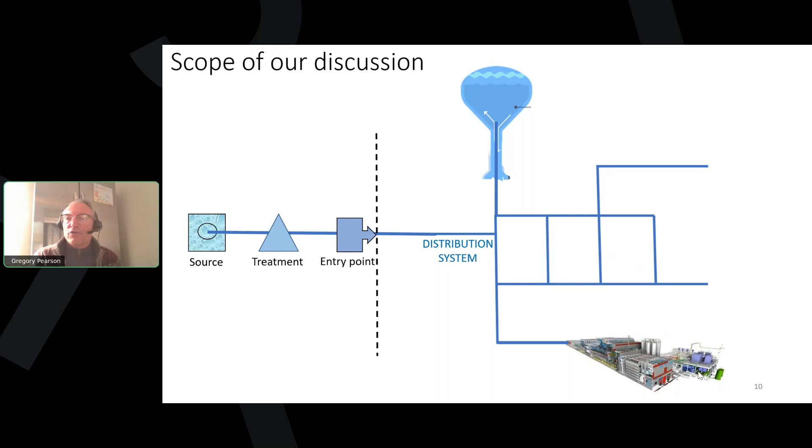If you're in a groundwater system, you might have multiple entry points after each well, just after disinfection. If you have a system with a treatment plant, you'll have treatment and initial primary disinfection. And after the contact time, it is going to enter into the distribution system.

In the distribution system, there are several aspects that we want to pay attention to that are related to quality. For example, in our storage facilities, there are water quality considerations, especially with water age. We could have short circuiting occurring in our storage. Or if we had a storage tank that was designed much larger than we need, we could have excessive water age. Different things can occur in a storage tank, such as nitrification, where nitrifying bacteria consume ammonia in the water and can lead to dangerous levels of nitrate in the water. So those are some of the things that we're going to be discussing.

That's one example. We could also have dead ends in our distribution system, portions of the distribution pipe network that just end and there's not adequate flow. So a variety of things can occur at a dead end. We can lose disinfection residual. We can have high water age. We can have biofilms and bacteria thriving in that dead end if we don't manage it in some way.

And in pipes, the topic of pipes in general, we can have bacterial growth, corrosion, and even problems with materials such as leaching and permeation that can happen in pipes. And also there can be points in the system such as sanitary defects and cross connections where contaminants can enter into the system. So that's kind of an example of the things that we're going to be discussing.

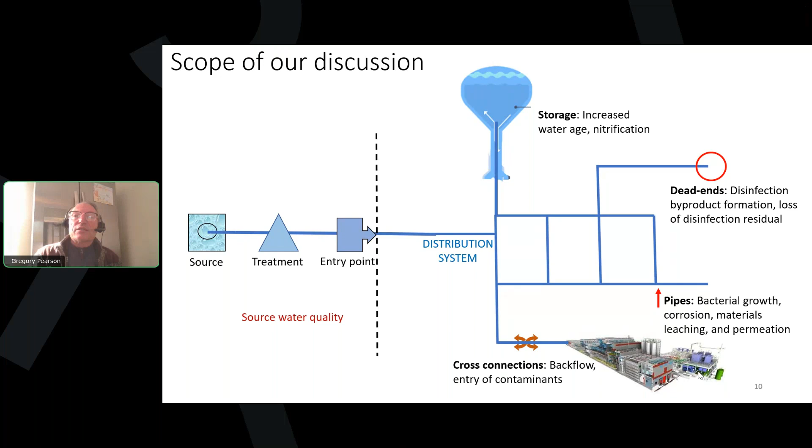Now, even though we're talking about this line between treatment and distribution, the source water quality and what happens at treatment, both of those things can have an impact on the water quality in the distribution system. So as we come across those instances, we'll point that out as we're moving through the training.

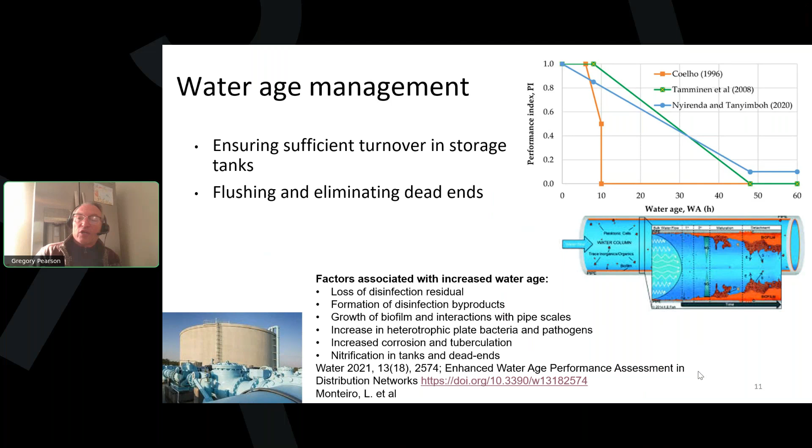And if you wanted to take a look at this study, I've included the link on this slide. It's called Enhanced Water Age Performance Assessment in Distribution Networks. It was done in 2021. It's a pretty recent study, and they were looking at all the factors that can affect water quality. I think that would be an interesting read for you.

We're going to go to our first poll already, poll number 1. And it asks, which of the following is a valid method to manage water age in distribution systems? Is the poll able to launch, Kristen? The poll is launched. And the answer options for this question are: ensure water remains in storage tanks as long as possible, keep at least one hydrant flushing 24 hours a day, periodically flush dead ends, or D, all of the above.

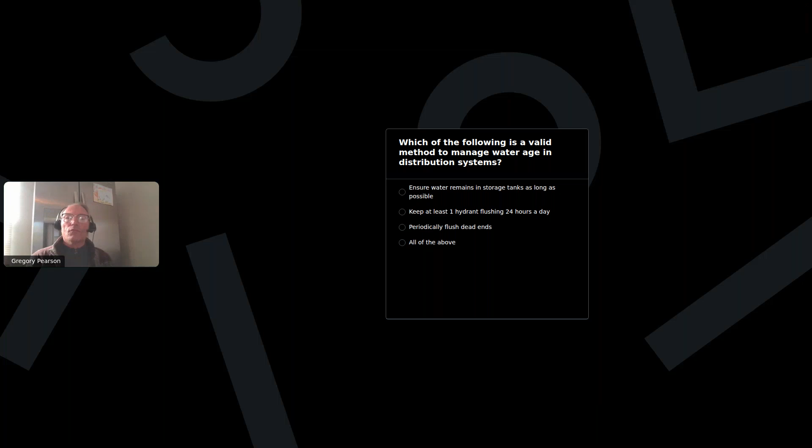All right, Greg, the majority of people, 82%, said C, periodically flush dead ends.

Excellent job. And thank you for managing that, Kristen. I didn't see the poll on my end because I'm on full screen, I guess. No problem. Well, I'll make sure to read through those for each one, okay? Thank you very much.

So periodically flushing dead ends is definitely one of the methods we can use to manage water age. So if we have problems with disinfection byproducts, maybe in the warmer summer months, maybe it's a monthly gentle flushing of those known dead ends that we have. We also want to work on preventing contaminants from entering the system. And we're still in the introduction portion of this training here, but there's two general ways that contaminants can enter.

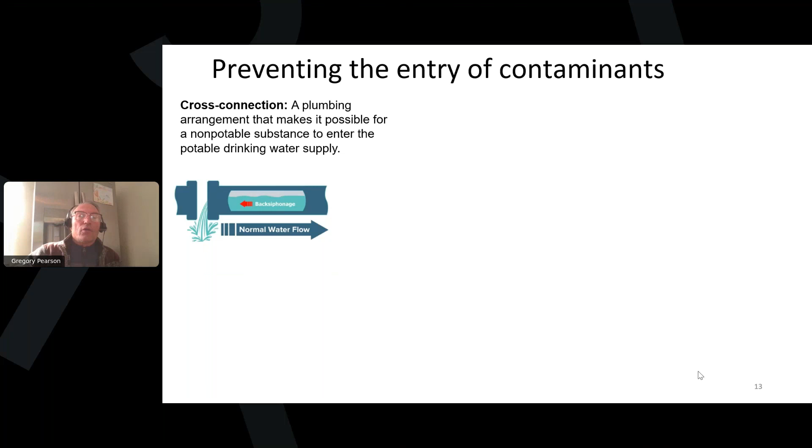One is through cross connections. A cross connection is not the same as backflow. A cross connection is a plumbing arrangement that could allow backflow to occur if there was some kind of reversal of flow. So the two types of backflow that could occur through a cross connection: back siphonage is one type, where the pressure in our distribution system is lost or reduced. And that could occur because there's a main break or there's excessive fire flow or some kind of outage that reduces the pressure in the distribution system.

The other type of backflow is due to back pressure, where we are supplying water to a customer that has some kind of pressure being applied to the water that exceeds the distribution system pressure. It could be anything ranging from a private well to some kind of boiler or possibly a chemical process that has a high pressure pump. It could even occur at a car wash, for example. And we try to protect this from occurring by, of course, first eliminating any unnecessary cross connections, but also protecting the water system with backflow devices. And we'll talk about that in a moment.

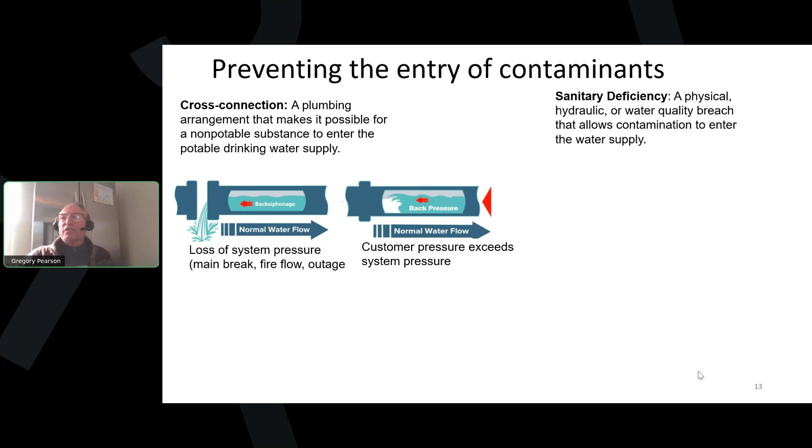The other general way that contaminants can enter the distribution system is through some kind of sanitary deficiency. It's usually some kind of physical breach in the distribution system that could allow contaminants to enter into the drinking water. An example could be an unscreened vent in the storage tank where birds or dust or debris could get into the storage tank. And I've seen more than one storage tank that had a bird at the bottom of the tank, and it was sitting in the tank deteriorating and could potentially make people sick. And there's a variety of sanitary deficiencies that could occur.

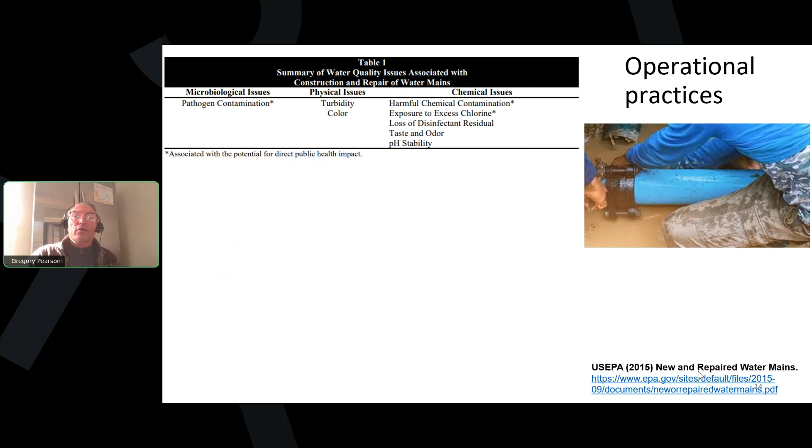And on the chemical issues as well, you could have potential chemical contamination associated with repair of water mains. If there was any kind of chemical or a nearby sewer main or something like that, you can imagine all of the things that could occur in runoff that have gotten into this trench that could be potential hazards if they entered the drinking water supply.

This actually manifested in a serious case in Missouri in 1990. That's not that long ago, but there were 240 documented cases of people getting sick. With these kinds of studies, there might always be more people that got sick but didn't go to the hospital. But at least 240 cases of illness, and 4 people died because of an E. coli outbreak, and it was traced back to 2 water main breaks.

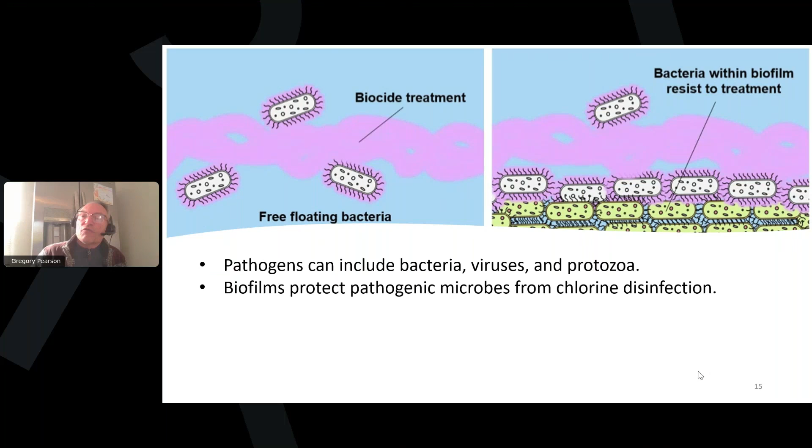It's hard to know. So you want to maintain your disinfection levels and do things such as system flushing, which can reduce these biofilms and help to keep the system clean, so the conditions are not present for bacterial growth to occur, and you're bringing fresh disinfection residual. So we're going to talk about system flushing for a few moments here.

And as you probably already know, I know we're preaching to the choir, because a lot of you are experienced operators, but there's several benefits of system flushing. And the top one, it reduces water age, but we mostly do it to remove the portion of the biofilms and scales that are in pipelines and to remove sediments. Flushing can also reduce the formation of disinfection byproducts, and if you flush dead ends, it brings in a new fresh chlorine residual.

And another good thing about a flushing program, it gives operators a chance to get around and operate the valves and the hydrants to make sure these are working. Having an operating valve that you can get to is important, and I've experienced this myself where you need a valve that has been paved over, for example, and you don't have access to the valve. And I've also been involved in projects to go and find all those valves and bring them up to grade.

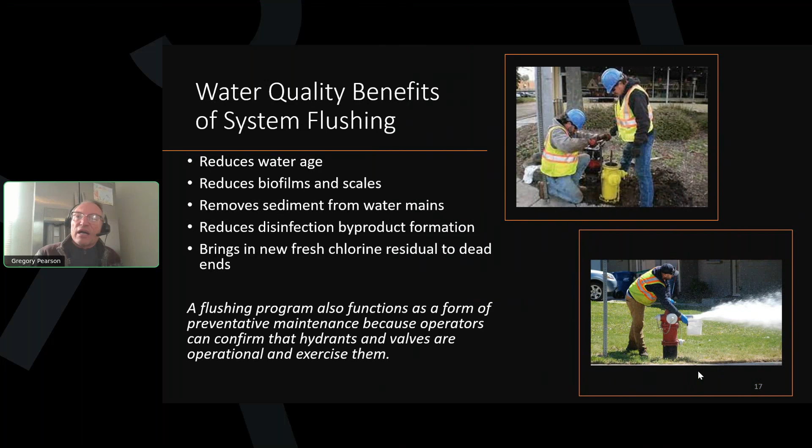And biofilm is really thin. When we talk about it and show it on diagrams, it seems like it's this real thick layer with all these different types of bacteria and microbial organisms. Well, it does include all that variety of microbial life, but it's actually very thin, as thin as a piece of Scotch tape.

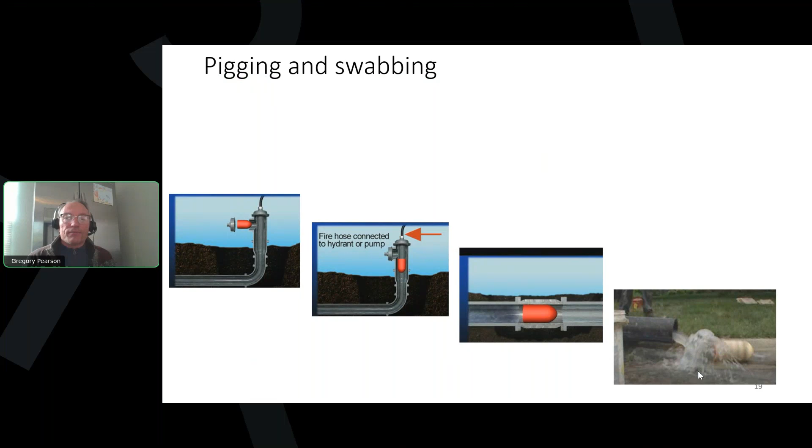Here's an example of flushing using pigs and swabs, and these images here are snippets from an AWWA video, which I'll share the link with you. But a swab is basically like a Nerf ball, you could think of, but it's shaped and sized so it fits right into the pipe that you're trying to flush. So a swab is just a big foam projectile, you might say, and a pig is often the same, but it's a little stiffer and has some kind of abrasive quality on the outside normally.

But you see on the left-hand side, they're inserting a swab at a hydrant, and then they apply a water pressure source, flow source to push it through the main, and it goes through. It's kind of removing, scouring the slimes and the sediments, and it's pushing it out, and then it comes out at a downstream hydrant or pipe, and it's very effective at removing sediments.

You can also have things that are called pigs that are actually data collection devices. For example, ultrasonic pigs, they could measure the thickness of a water main as it passes through very slowly. Those types of pigs, you'd probably run them through just very slowly, but these types of pigs, you're running them through at a pretty good clip because you're trying to remove sediments.

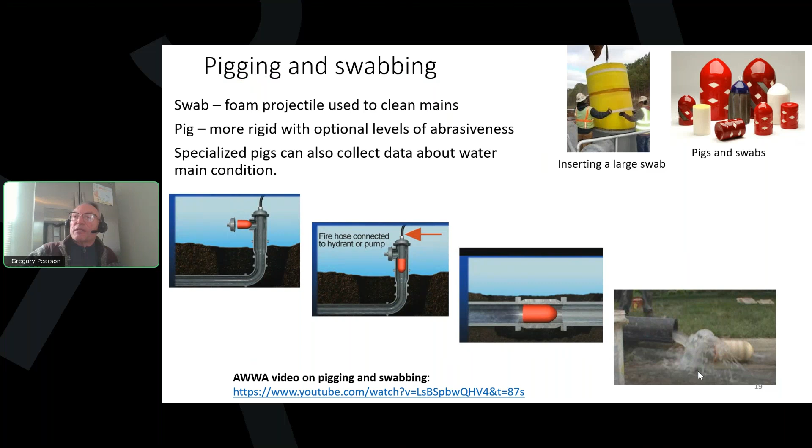And that video is on your slide at the bottom of that slide there, an AWWA video, which actually animates this process. And here's an image of a couple operators inserting a much larger swab. It looks like it's at least a 24-inch to me. I'm not sure of the exact dimensions, but they're inserting that in, and they're going to run it through a section of main. And you can see a selection here on the far right of your screen of different types of pigs and swabs. The red ones and that middle blue one, you can see there's definitely some abrasive material on the outside that will help to remove some of those slimes.

There's also the concept of ice pigging. And ice pigging is very effective at removing sediments and scales and biofilm. It's often used to remove biofilm. And so ice pigging uses kind of a semi-solid ice solution. They bring it down to 24 degrees, and it's water and brine, it's not just pure water, because they don't want it to freeze. The brine acts kind of like an antifreeze.

It's more kind of like a snow cone. So it has all the abrasiveness of the ice, but it can flow around corners and so forth. You couldn't do that with a solid piece of ice, obviously. Very effective at removing biofilm and sediments. And also you prevent the danger of it getting stuck, because if it somehow were to get stuck, it would just melt. So that's another benefit.

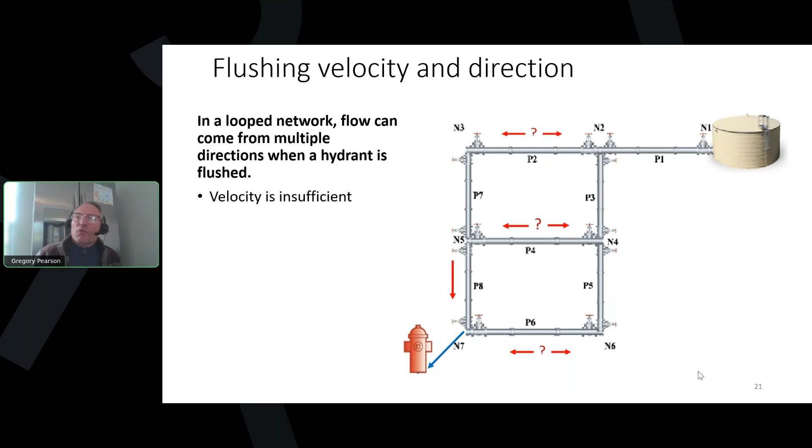Remember, we want between 2.5 and 5 feet per second, but if the water is going different directions, we can't attain velocity, and we can't really efficiently move the sediments from point A to point B. We might just be moving the sediments around, but not actually removing them. Instead, what we do is unidirectional flushing, and we close certain valves. Let's say, for example, we want to go down the top pipe and then down the left pipe.

We would close particular valves here so that we force the water to go in just one unidirectional path. And then we can be assured that we can attain the velocity we need. And it also helps us to make sure we're thoroughly cleaning each pipe.

And we'd go back, and you see there's a middle pipe called P4 and a bottom horizontal pipe called P6 and P3 and P5. We could close different valves to clean each one of those individually. So we can systematically move the sediments by flushing the water from the source of the pressure throughout the distribution system one at a time. So we're making sure we're getting all the sediments out.

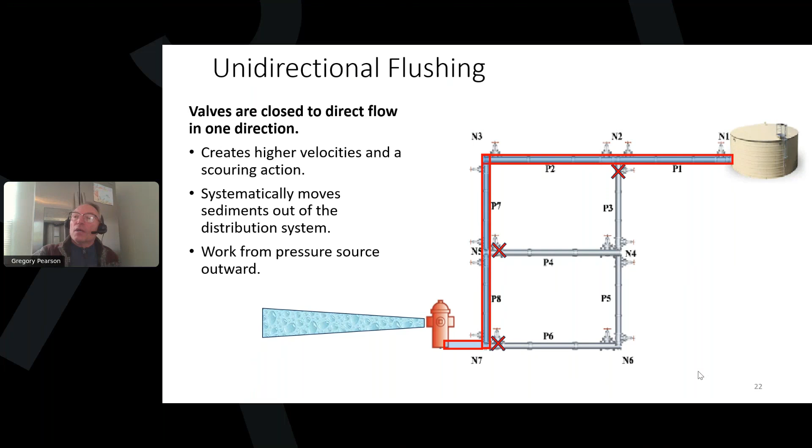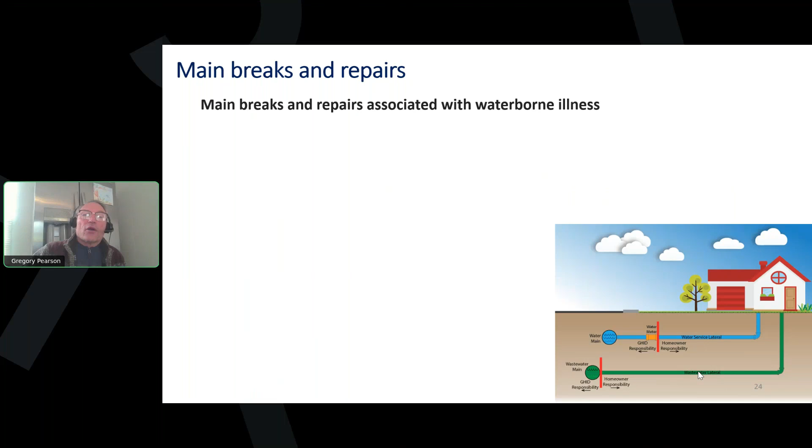If we shift our discussion here to looking at the waterborne disease that's associated with main breaks and repairs, we can see some fairly recent studies. So one was done in 2007 in Norway. They found that households that were downstream of a main break or repair, that's shocking to me. I can see a main break, but a planned repair is surprising. So anything downstream of a main break or repair, there was a greater incidence of gastrointestinal illness.

Same thing in Sweden in 2017, a more recent study. Households were 1.9 times more likely to report an acute gastrointestinal illness after a pipe break or repair in the distribution system. So these are critical tasks that we as operators need to do. We're the ones that have to go out and respond to main breaks and make these repairs. But even planned repairs can result and do result in increased illness. So that's why we have to really be careful.

There are some factors that we discussed a little bit already, but if you have a wastewater system that's relatively at the same level as the water pipelines, and that wastewater main has some small leaks, we could end up having sewer water in our trench and just contaminated groundwater in the trench from the surrounding soil, like we saw in the chart earlier. And of course, cross connections. If you have a main break, it can pull in contaminants through cross connections. So you see how all these things are related here.

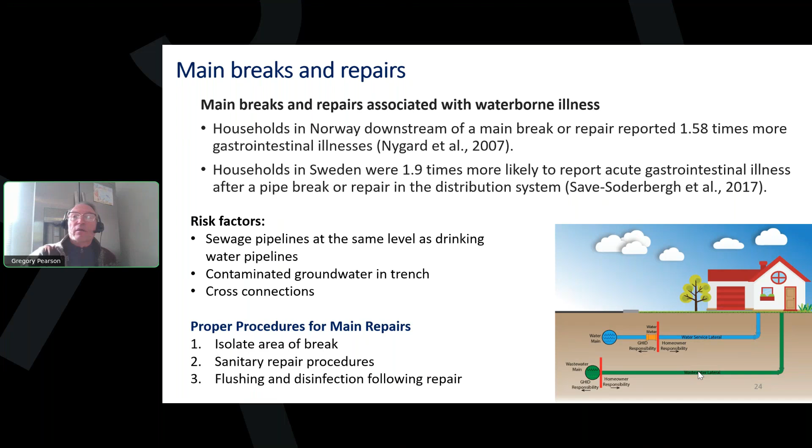Depending on the state that you look at, people say this different ways, but if you lose system pressure and the system is compromised, it's a good idea to issue a boil water notice. That means if the pressure drops even below 20 psi and the system is compromised, you might want to issue a precautionary boil water notice. But for sure, any time that you know that contamination probably has entered. And a boil water notice is just letting people know, boil your water before you use it.

There's a couple of AWWA standards you might want to have in your library. The first is the C651, which is about disinfecting water mains, and they talk in that standard about disinfecting water mains after repairs and breaks. And also there's a water main breaks field guide that AWWA offers. But I did put several resource links into the references sheet about managing water breaks and disinfecting water mains.

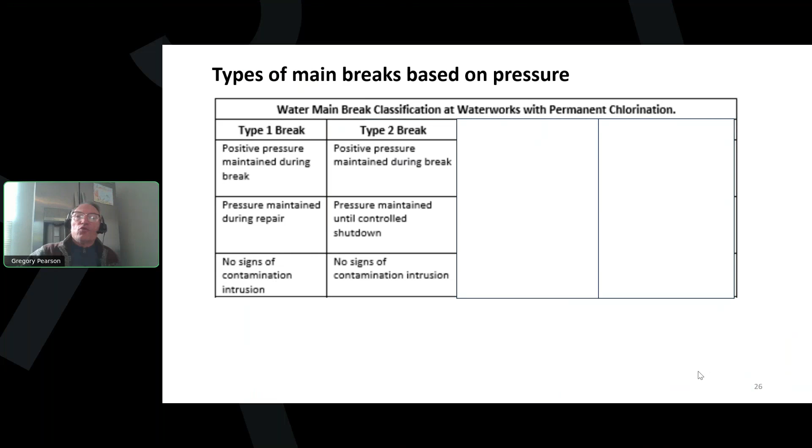Similar is one where you can maintain pressure, but you do a controlled shutdown, so you're not having contamination. So basically, if you don't lose pressure, you may be able to make the repair without a specific disinfection process. But anytime you lose pressure, or if the pressure even drops below 20, you are looking at some additional steps, wanting to isolate that possibly, flush and disinfect, and then disinfect the pipe and all the tools, always with at least a 1% bleach solution.

So the type 3 and the type 4 breaks are different situations where you lose pressure. And the type 4 results in a widespread depressurization of a large portion of the distribution system. So you might be disinfecting and flushing a lot larger portion of the system than with a type 3 break, where you just flush and disinfect the portion that you repaired. But in both cases, you've lost pressure.

We're going to go to poll 2 now. All right, that second poll is now launched. How can operators protect water quality when repairing main breaks? A, isolate the repair site using valves. B, flush the line after repair. C, disinfect the main. Or D, all of the above.

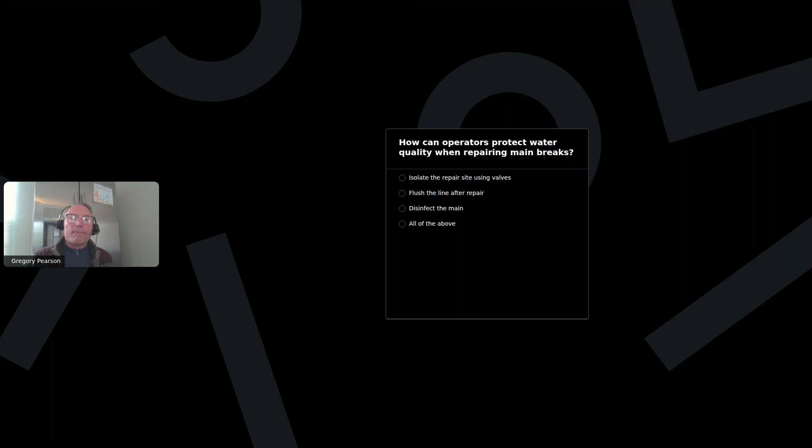Go ahead and get your answers in if you haven't already. I'll give everyone just a few more seconds. All right, and I am ending the poll now. Okay, Greg, 100% of people said D, all of the above. Excellent. You guys are great students.

So not only do you have corrosion occurring with the iron being ripped out of the molecular structure, but having it redeposited. And this is a big problem. As you can probably see here, you would have a lot of friction in that pipe. So you're going to have higher energy to force water through those pipes. You're going to have reduced capacity, and you're going to have areas in that pipe that's going to harbor bacterial growth. And of course, eventually the pipe is going to become weaker and weaker and be more likely to break.

Also, corrosion is associated with the release of lead and copper. Daryl's going to talk about the lead and copper rule a little more tomorrow, but corrosion is responsible for that, the release of lead and copper. Also, eventually these pipes will leak and you'll have water loss and microbiological problems.

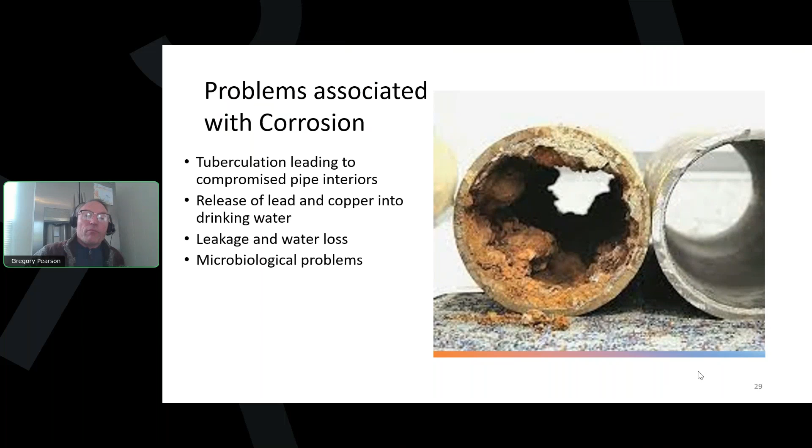So if we give an example here, if we have an aluminum fitting attached to a copper pipe, here we have the aluminum attached to a copper, aluminum is going to be the anode. Electrons are going to be ripped out of that aluminum. Or you can see just above that, the cast iron would also lose electrons to the copper.

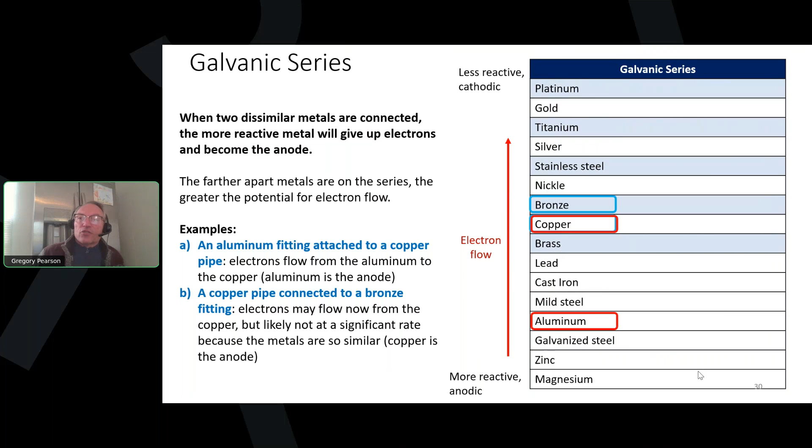On the other hand, if we had copper attached to bronze, that would make the copper the anode and the bronze would be the cathode. So technically, that would be the relationship. However, these two metals are so close to each other, it's unlikely you would have a corrosion problem between these two types of metals because they're so close to each other on the galvanic series.

Now, I say it was destroyed. Now, cast iron, that might have been a 70-year-old pipe or something like that. So, cast iron, it's not our preferred pipe. We don't really install that anymore in water systems. However, a lot of cast iron pipe is still in service, but just know that it is more susceptible to corrosion than something like ductile iron. There was a reason why they made ductile iron and especially cement coated ductile iron, because they're trying to develop materials that are corrosion resistant.

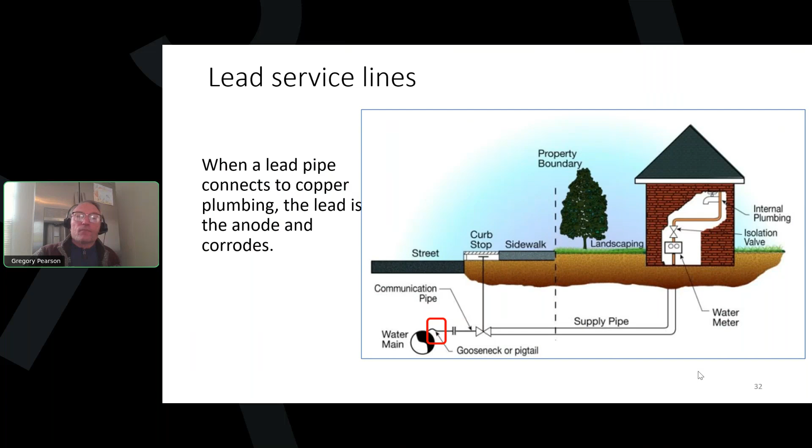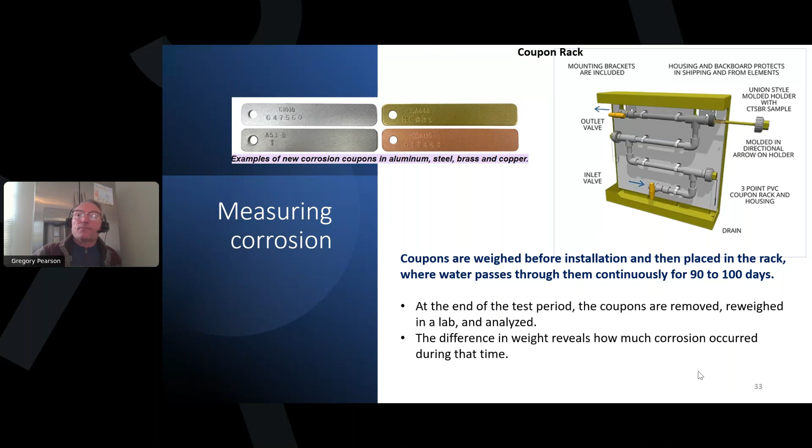And then finally, cathodic protection, which uses a DC current. If electrons are trying to flow from the pipe or the tank, the DC current goes in the opposite direction to disrupt that flow, and has sacrificial anodes that will give up electrons instead of the material you're trying to protect. I'll show you an example of that here.

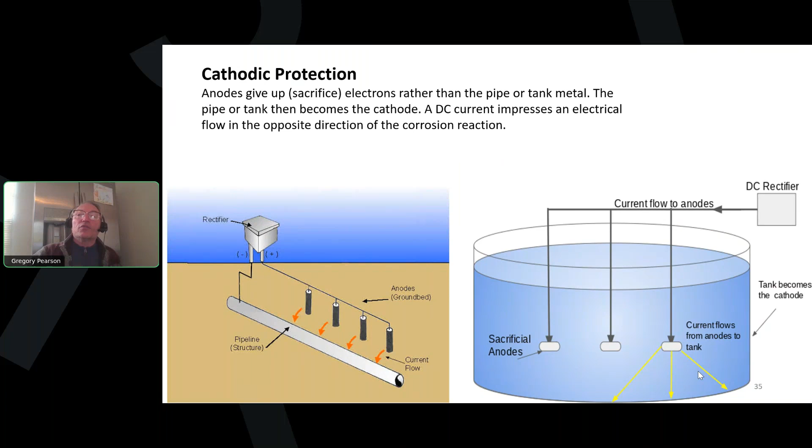So that's cathodic protection. A way to predict when corrosion is going to occur involves using the chloride to sulfate mass ratio. They call this the CSMR. This was something that is associated with what happened in Flint, Michigan, and I'll show you that in a moment.

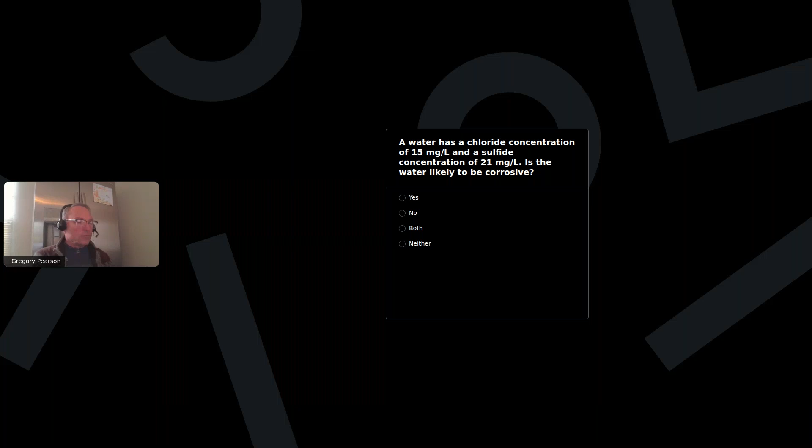All right, the majority of people have put in their polling votes, but I'll give everyone just a couple more seconds and then I'll close the poll. All right, closing the poll now.

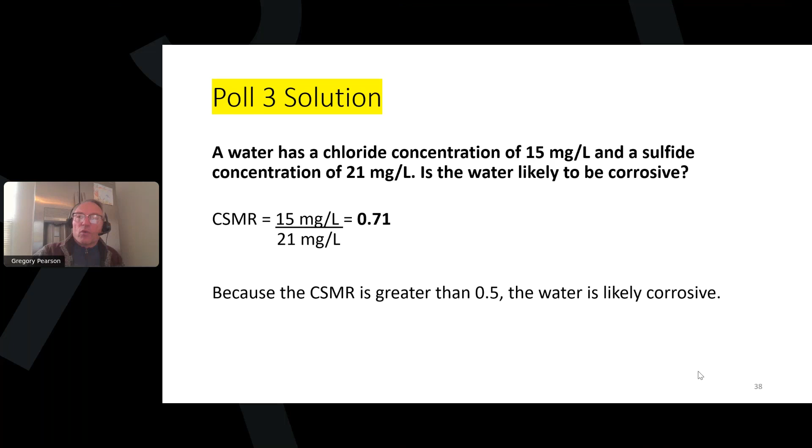All right, Greg, so 79%, the majority of people said yes, that the water is likely to be corrosive. Excellent job, everyone. Let's look at the solution here. It's chloride to sulfate, so we take the chloride of 15 milligrams per liter divided by the 21 milligrams per liter of sulfate, and we get 0.71. And because that's greater than 0.5, it indicates that the water is likely corrosive, or potentially corrosive, you might say. There's other factors, such as the Langelier index.

If there's a lower pH than the saturation pH, it means that the water is likely to be corrosive. The saturation index or the saturation level means you have a level of alkalinity that is just saturated. In other words, it's not going to be scale forming and it's not going to be corrosive. And so we look at the difference between the actual pH and that saturation level.

And this somewhat depends on the temperature of the water. It's pH dependent. If this is negative, the actual minus the saturation negative, it indicates that water could be corrosive. If it's positive, it means it can be scale forming. If it's 0, it's not going to be scale forming or corrosive. And of course, there's a range.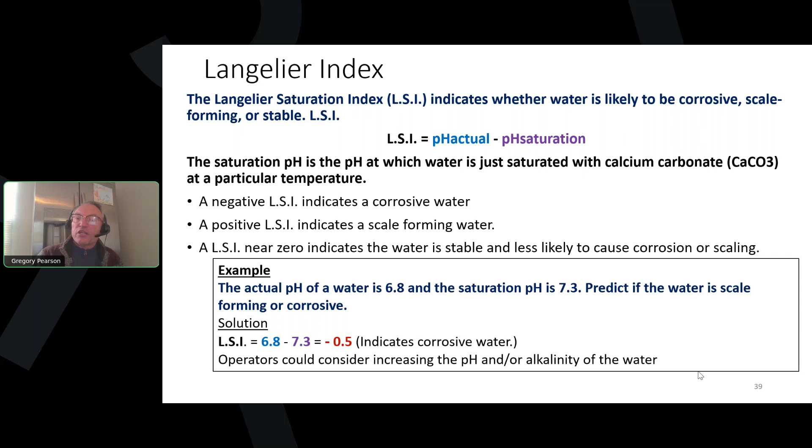So using the Langelier index along with that chloride to sulfate mass ratio, and then of course also looking at the pH and alkalinity and overall water quality, those would be good things to look at. And the first step if you did have a corrosive water would be to possibly consider adjusting the pH or alkalinity. Alkalinity below 30 is indicative of likelihood to be corrosive.

And if you get up higher, even as high as 200 milligrams per liter, it actually is good to prevent corrosion. Of course, the higher you go could also be a problem with scale formation if your pH was higher than the saturation pH. If you needed to adjust alkalinity, you could add something like lime or soda ash. If you needed to adjust only the pH, you could use something like sodium hydroxide.

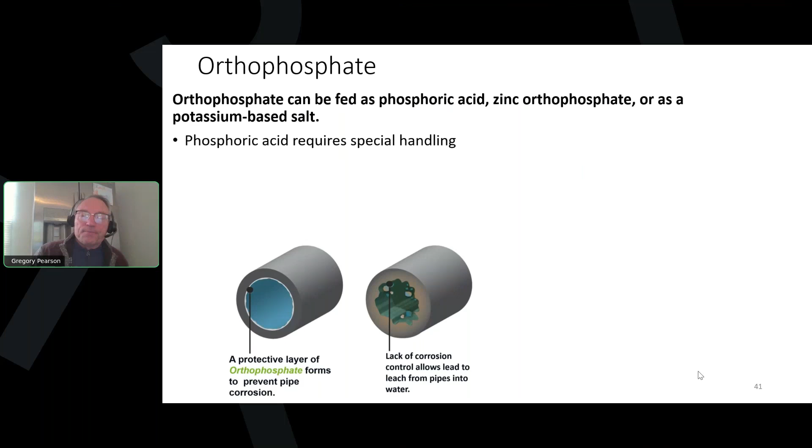If those don't work and we need to feed a corrosion inhibitor, we can feed something that results in orthophosphate. And there's several things that we can use: phosphoric acid, zinc orthophosphate, or some kind of potassium-based salt. And if you use phosphoric acid, that's a very dangerous chemical. It can cause severe burns, and so it's not often used. And ultimately, the dosage is pretty low, between 0.5 and 1.5. You don't want it to be too high. You don't want excessive scale to build up.

And this orthophosphate can even help prevent problems when you transition from one type of disinfectant chemical to another, such as from chlorine to chloramine. In looking at the different options, no matter what type of chemical you use, it's orthophosphate which is the end result, the PO4, basically a phosphate oxide. So you're trying to create that. So you can use phosphoric acid once again, but more likely you're going to want to use zinc orthophosphate or some kind of potassium-based salt.

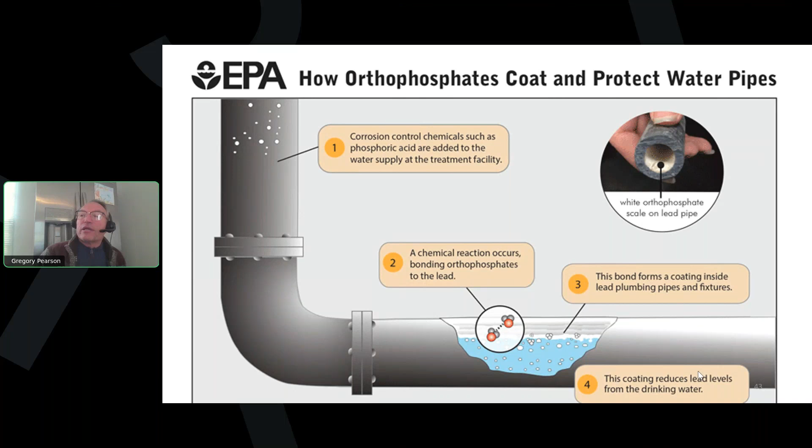There's a lot of factors that are involved with causing tuberculation. Probably the first one would be just having cast iron pipes, but also you have water, say for example, with a low pH and alkalinity, a higher temperature, and higher water age, and the conditions are right for biofilm growth.

Maybe there's a little bit of organics in the water, and then you've got a recipe for tuberculation to happen. And if it does occur, it reduces your capacity, increases the friction, and causes a lot of problems with water quality and main breaks.

And scales and biofilms can actually interact in other ways as well, not just in tuberculation. When scales interact with biofilms, it can result in the release of toxic heavy metals from scales, and the biofilm can take it up, and then as the biofilm detaches and reattaches, it can release some of those. And of course, biofilm can also release pathogens at any time, and it can also enhance corrosion processes because it's occurring near the pipe surface between the biofilm and scale. It's happening at a micro level, and it can enhance corrosion.

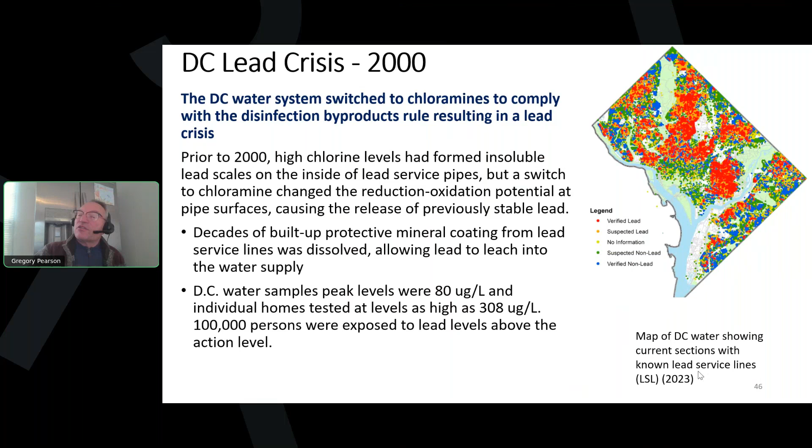And it actually was worse as far as the official measured levels than Flint. In DC, they measured levels as high as 80 micrograms per liter. And there was some testing at individual homes that were as high as 308 micrograms per liter, and 100,000 people were exposed. You see the map of DC Water. This is a current map showing areas that still have lead service lines. So they're still dealing with this.

They switched to feeding orthophosphate in 2004 as a solution, but this is not a problem that they were able to just solve in a couple months. It's an ongoing process that they're still working on. They're in compliance now, but they still have to work on removing the lead service lines.

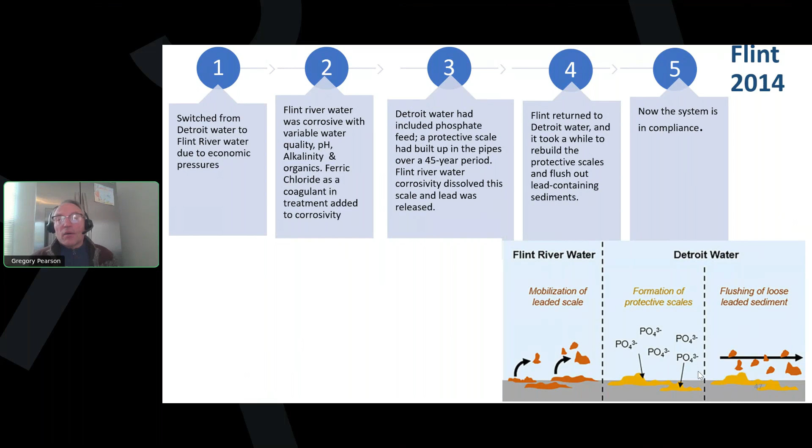In Flint, they switched water source: they were taking water from Detroit, and they switched to the Flint River, and it had variable water quality characteristics, and there was a high chloride to sulfate mass ratio. They also were using ferric chloride as a coagulant in the treatment process, which, except for the problems that occurred, was actually a great choice. It was inexpensive, and it works well in cold weather, and Michigan is a cold place. However, adding ferric chloride to water that already had a chloride to sulfate mass ratio problem increased the corrosivity quite a bit.

And they had been using Detroit water for 45 years, and Detroit water had been feeding orthophosphate. So they had this scale in the service line pipes, and this scale was dissolved. Kind of the same story, but a different route, and it began to release lead and copper. And it was also very corrosive. And so the existing copper and lead service lines were being corroded, and lead and copper, mostly lead was the problem here, was being released into the water.

It also resulted in the iron pipes being corroded, which took away the chlorine residuals. So there were actually some serious problems. Some people died. It wasn't because of lead necessarily. It was because of a loss of chlorine residual, and I think it was 12 people that were affected by a waterborne disease. They're now in compliance, but there are a lot of lessons that we learned here. First of all, that chloride to sulfate mass ratio was 2.04, very high. The corrosivity not only caused problems with lead, but it also consumed chlorine, which reduced the microbial protection.

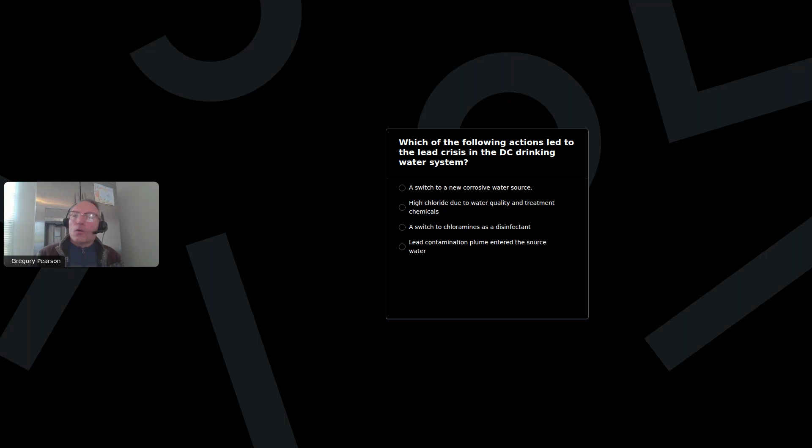All right, we got kind of a mixed bag here, but the majority of people said C, a switch to chloramines as a disinfectant. That's 62% of people said that.

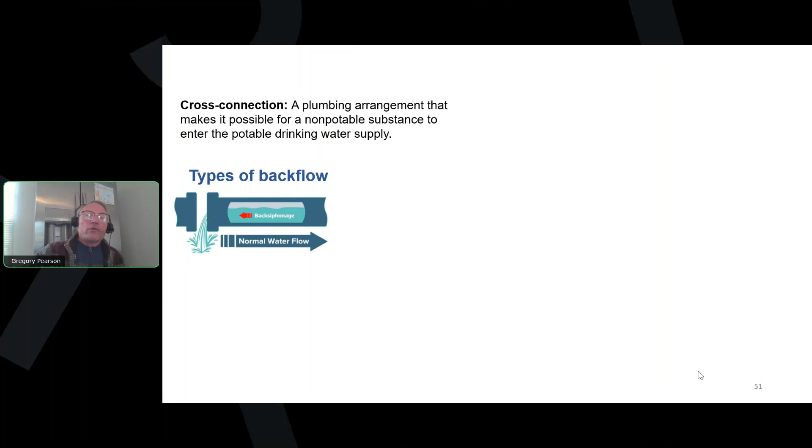Now, we talked about this a little bit already, but cross connections are just simply a plumbing arrangement. And there's 2 types of backflows: back siphonage and back pressure. And a backflow event requires both of these things to be present: the existence of a cross connection and some kind of pressure differential that causes a reversal of flow. There's some different ways to protect against this. And basically, when you put in a backflow protection device, you're removing that cross connection, because the cross connection is a pathway that water can flow through, where if you put a protection device there, water can no longer move in a reverse direction through that same pathway.

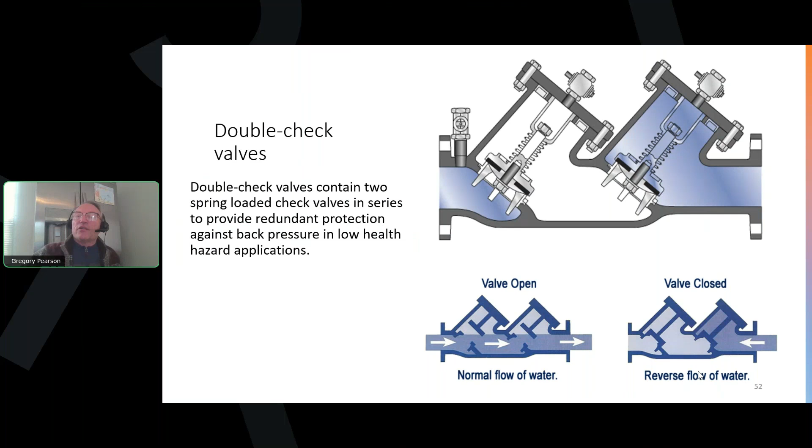A double check valve is an example of a backflow protection device, and it basically is just 2 check valves in series. When the water is moving in the way I have the picture here, if it's moving from left to right, the water pushes those check valves open. It can pass through. If it tries to go from right to left, in other words, a reversal of flow, it forces those check valves closed. And by having 2 valves in series, we have redundancy.

The most positive way to protect the distribution system is by completely separating the system. An air gap would be complete separation. The disadvantage of an air gap is you can't supply pressure to the position. But where we would use it is if we were supplying water to a wastewater treatment plant, for example. We would not want any possible pathway for that wastewater to get back into the distribution system.

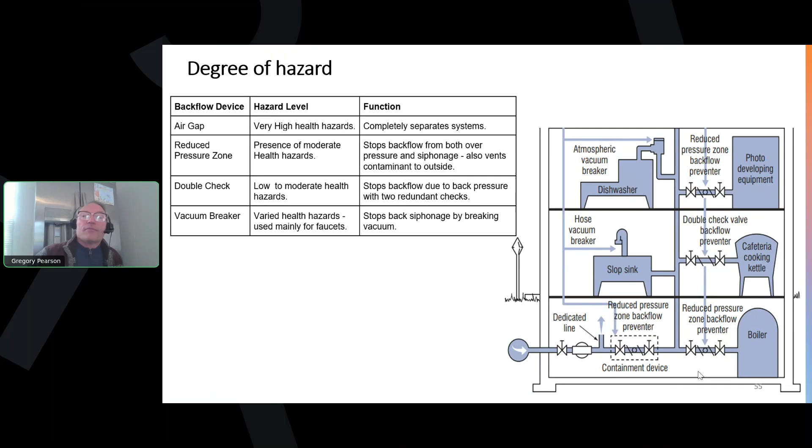We're going to go to poll 5 now. All right, poll 5 is launched. Which device provides the minimum necessary protection from backflow when providing water under pressure to a chemical facility? Is it A, reduced pressure zone assembly, B, double check valve, C, vacuum breaker, or D, air gap?

All right, the majority of people have put in their answers, but I'll give everyone just a couple more seconds to throw in your answer. And then I'll be closing the poll. All right, closing it now.

And Greg, we had quite a variety of answers here. 34% of people said A, reduced pressure zone assembly, and 30% of people said B, double check valve. But both vacuum breaker and air gap also had some answers.

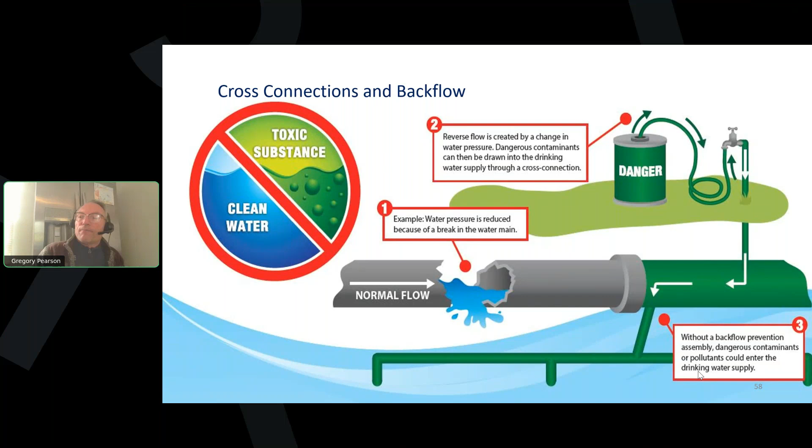If we look at some examples here of the same thing, we have a water main break. The pressure is reduced. It creates a vacuum that pulls water through a hose and into the drinking water system. And those green pipes at the very bottom of that image represent other points in the distribution system where that contaminated water could flow if we don't have backflow protection. And basically, this type of a problem where you have a hose and a bucket is called a submerged outlet.

And it could be a plumbing situation where you have a pipe plumbed into the bottom of a tank, or just a hose that is submerged underneath the level. And so any kind of back siphonage can cause that water to be drawn out of that tank. In this case, that image shows some hazardous chemical that the hose is dipped into.

One way to prevent that is to have a vacuum breaker, and some communities will require outside hose bibs to have vacuum breakers. And other communities deal with it by making sure that people that apply pesticides and herbicides are educated. But anything that has a submerged outlet needs to be protected with either a vacuum breaker or a pressure vacuum breaker.

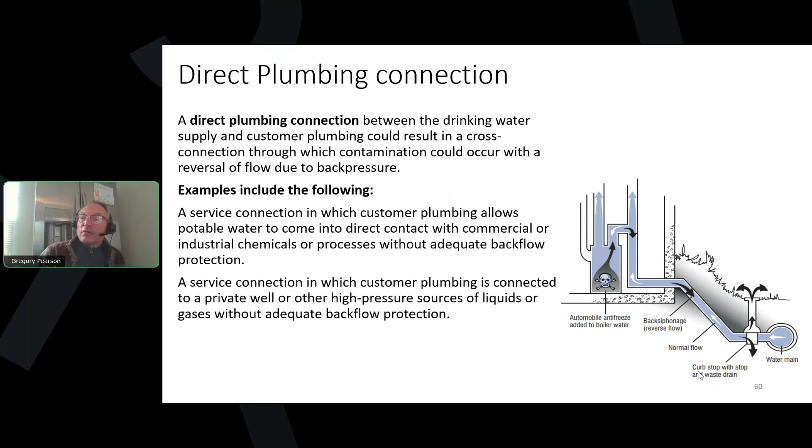So a service connection that goes to an industrial process, or if you have a service connection with a customer, a residential customer that has a private well, or a customer that has some kind of high pressure source of liquids or even gases that's connected, and you don't have adequate backflow protection.

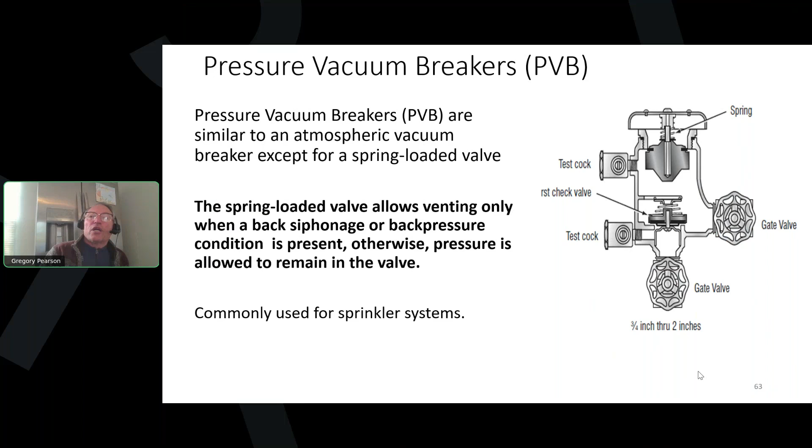Now the pressure vacuum breaker, I should say, it's similar, but it's spring loaded, so it doesn't just vent to the atmosphere when it's turned off. It only vents to the atmosphere when there's a potential back siphonage or back pressure. These are commonly used on sprinkler systems. So it's the same kind of a thing, just as a spring-loaded valve. In other words, the backflow would have to push that spring-loaded valve open for it to close.

Some things that you would need for a cross-connection control program: your board would need to make sure that it votes in legal authority to enforce the regulations and find the statutes that support that. You'd want to have an inventory of all the potential cross connections in the system, and training. And one way to solve that is just to hire an outside contractor that does the backflow testing.

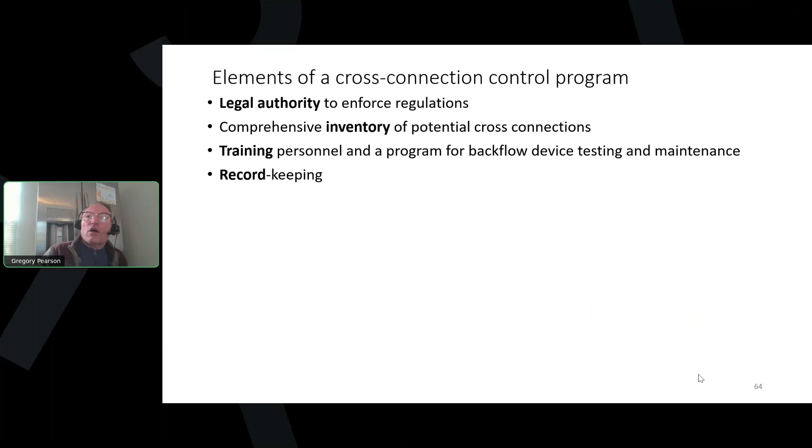And in a lot of cases, water systems require the customers to pay for and contract the backflow testing service. But you need some kind of way to keep records too, because at least annually, all of the cross connection control backflow devices should be inspected, and it should be reported to the utility. You need to have a record of that.

And I've included a couple of resources that you could check out on this slide. Plumbing code link, the Association of Plumbing and Mechanical Officials link, and a set of standards from that international association.

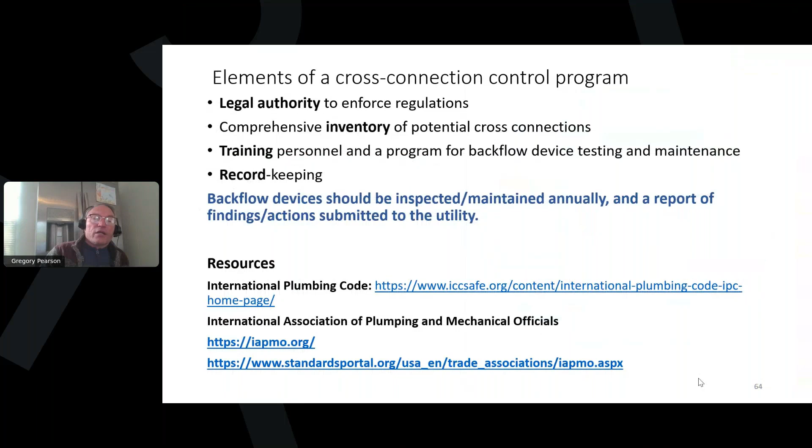And the goals are obviously to prevent harmful substances from entering the drinking water, but also identifying and eliminating any cross connections and sanitary deficiencies. And you want to establish some kind of a uniform set of standards that protect water quality throughout the distribution system, and require businesses and industries and residences to install the appropriate type of backflow device. So you want to know the answer before the question comes up of what kind of backflow device is needed.

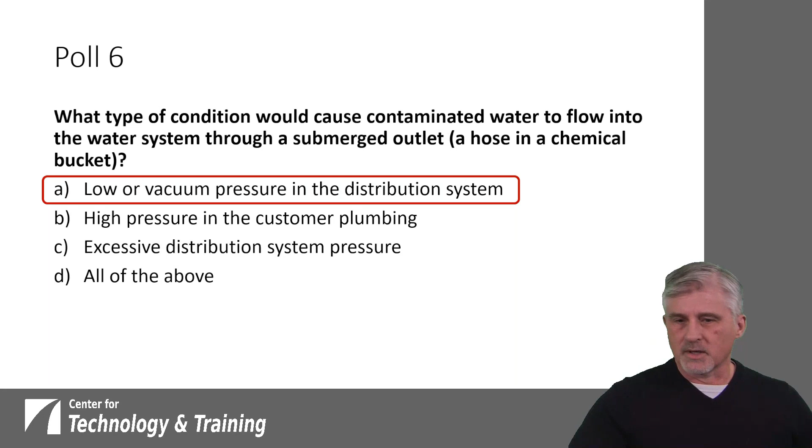Kristen, can you tell us how the responses came out? Yes, so the majority of people said A. Okay, and A is the correct answer. So if you remember back to the examples that Greg used, this would have been the submerged outlet example. And that's quite often the bucket on the hose bib outside someone's home or something like that.

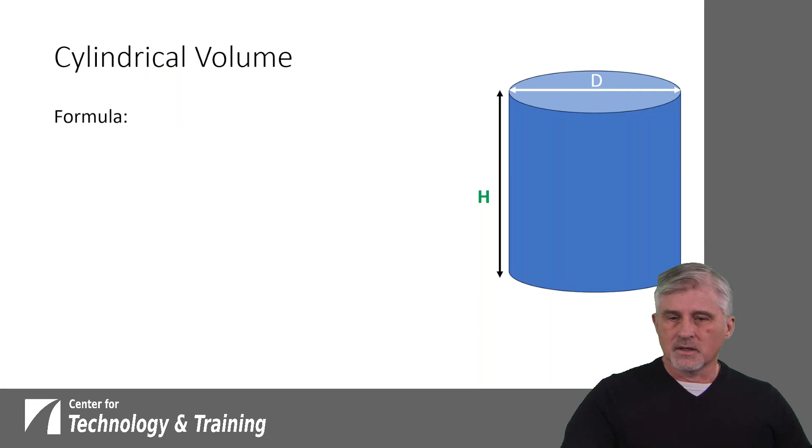Note that ft³ is an abbreviation for cubic feet. The more common one would be our cylindrical volumes, and that's quite often our tanks and our water mains or pipes. There's a couple different ways we can do this. One of them is 0.785 times the diameter squared times the height. The one that I learned would be pi times r squared, the radius, times the height. You can use either one of those formulas.

And we've got a little example here. What is the volume of a tank with a diameter of 20 feet and a height of 30 feet? We can put that information into either formula. In this case, 0.785 times the diameter of 20 times the diameter of 20 times the height of 30. You could also use pi r squared, in which case you're going to use the radius of 10 instead. And that gives you 9,420 cubic feet.

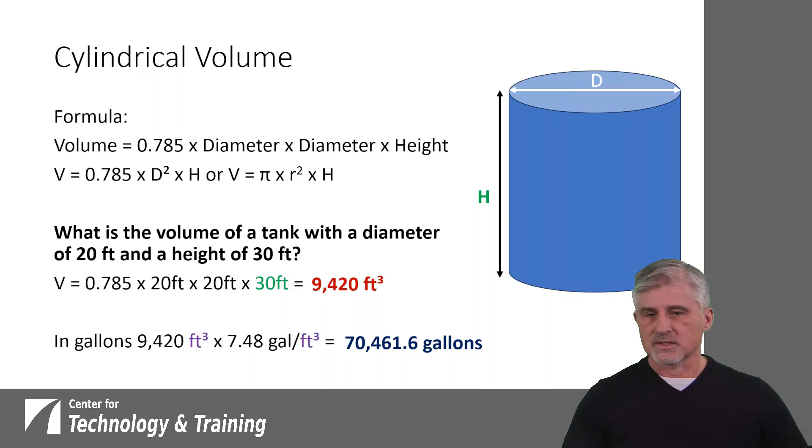If we want to know what that's in gallons, we take the number of cubic feet and multiply it by the conversion factor of 7.48 gallons per cubic foot. That tank with a diameter of 20 feet and height of 30 feet would have 70,461.6 gallons in it. So I had mentioned that there's a conversion factor: 1 cubic foot of water is equal to 7.48 gallons. It's almost 7.5 gallons.

So here's a quick question. How many gallons can a 24 cubic foot tank hold? If we take our 24 cubic feet and multiply it by the 7.48 gallons per cubic foot, the cubic feet are going to cancel. We'll have left over a number that's in gallons. And so in a 24 cubic foot tank, we'll have 179.5 gallons.

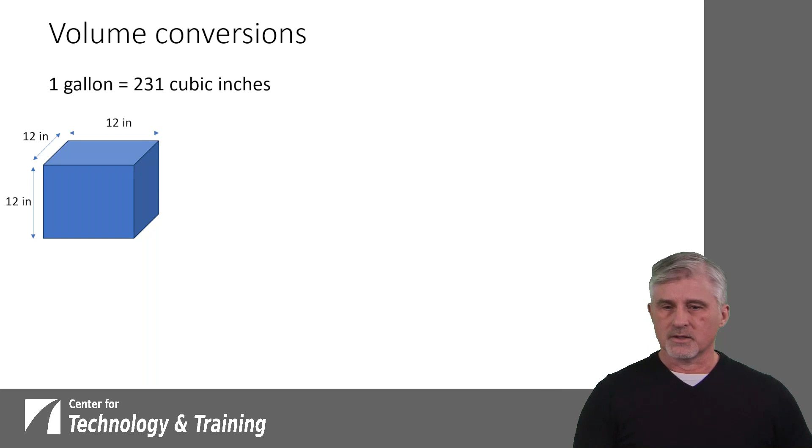All right, so let's look at some volume conversions. A gallon of water is also equal to 231 cubic inches. So how many cubic inches are in a cubic foot? We simply multiply each of those sides together, 12 by 12 by 12. And so there's 1,728 cubic inches in a cubic foot.

So then that begs the question, how many gallons are in that cubic foot, or that 1,728 cubic inches? So if we take our 1,728 cubic inches, we divide it by the 231 cubic inches in 1 gallon, our cubic inches will cancel here, and we'll be left with 7.48 gallons is equal to a cubic foot.

So we've kind of come around in a different way to show that conversion factor, where it comes from. And if you're in the water industry, that's a conversion factor that's worth memorizing. And it may become helpful in our poll questions as well.

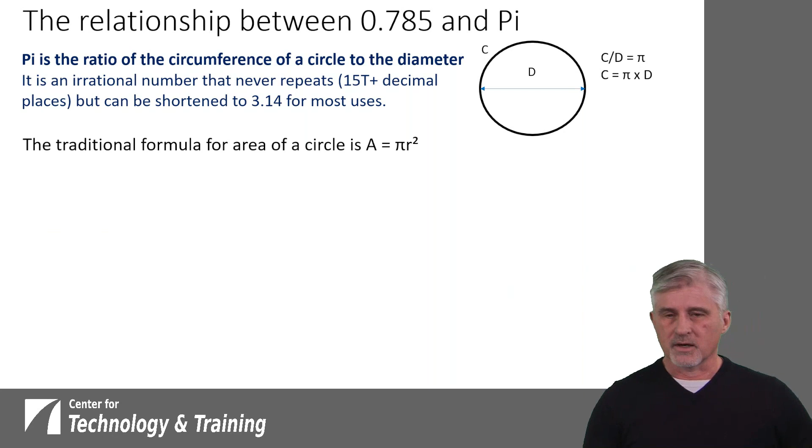And that traditional formula for area is equal to pi r squared. When you use the diameter instead of the radius, the radius is equal to the diameter divided by 2. So if we put that in there, as you can see, 3.14 times the diameter divided by 2 times the diameter divided by 2. The dividing by 2 comes out as a 4 on the bottom. And we divide 3.14 by 4, it becomes 0.785. And so that's how that relationship works.

So what we're saying is that the area of a circle, compared to a square with sides the same as the diameter, is about 78.5% of it. And that's kind of depicted here in this figure over on the right.

Yeah, if Ingrid moves me out of the way.

So that just shows you the relationship. And more and more the 0.785 is becoming, I think, simpler for some people. So I think that's why we're starting to see it used. But you can use either one, whatever works for you.

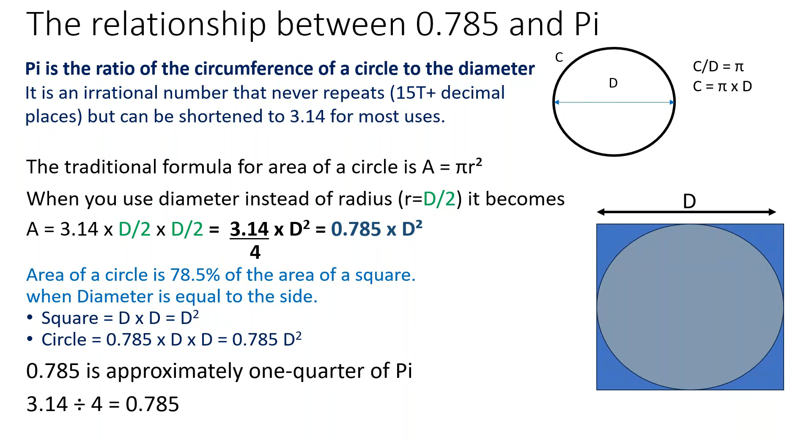So now we're going to go on to talk about flow. And flow is quite often depicted as Q. And flow is the area times the velocity. Some of the units we'll see flow in: cubic feet per second, gallons per minute, gallons per day, million gallons per day. Our area for this formula is quite often in square feet, velocity in feet per second.

So we need to determine the area of a circle. In this case, if we're looking at the cross-sectional area of pipe flow, we're going to use our 0.785 times d squared or pi r squared. So what is the area of a circle with a diameter of 4 feet? Just simply put that into either of our formulas. 0.785 times 4 times 4 gives us 12.56 square feet.

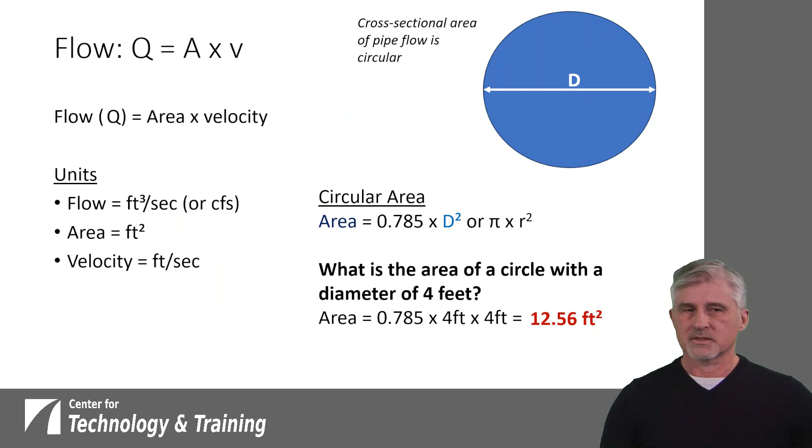So the first thing we're going to do is we're going to convert from inches to feet. So we've got our pipe diameter is 6 inches. We want to get that into feet, so we've got similar units and we can run our calculations. So if we divide the 6 inches by 12 inches, that'll tell us that we have a half a foot as a diameter. Next thing we want to do is we want to calculate the area of our pipe.

So the area is equal to 0.785 times 0.5 times 0.5, or it's 0.19625 square feet. So that's the area of our 6-inch pipe in feet. Now we're going to use the flow formula. So we know our area and we know our velocity. They gave us a velocity of 2 feet per second. So we're going to put those in. So Q equals our area times our velocity. In this case, 0.19625 square feet times the 2 feet per second.

The result is going to be that our feet are going to go from, we've got squared and we've got a single, so that'll be cubic, and we'll have 0.3925 cubic feet per second. So that's the flow in a 6-inch pipe with a velocity of 2 feet per second. So let's look a little more at this equation.

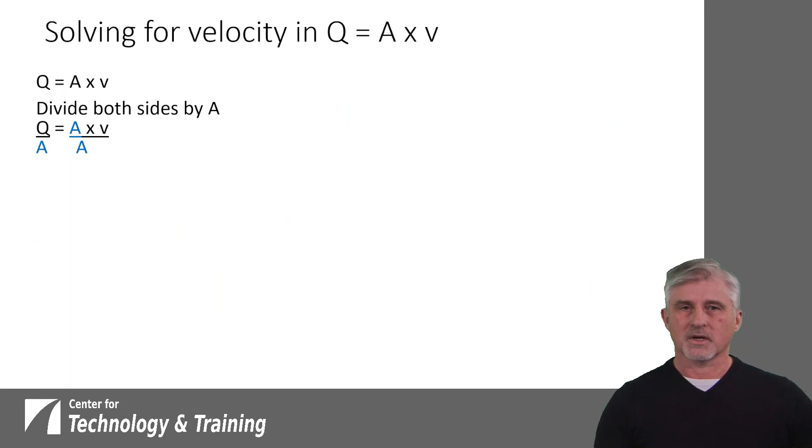So we can modify this equation if we look at it and we divide both sides of the equation by A. So we'll have Q over A on one side, and if we divide both sides of the equation, we're going to cancel out the A's on the other side. So that in essence is going to give us our velocity is equal to flow divided by area. And this is helpful if we know what our flow is and we can calculate the area of our pipe, then we can determine what the velocity is in that pipe at that flow.

So let's look at a pipe with a cross-sectional area of 0.23 square feet. It has a flow of 0.75 cubic feet per second. What is the velocity in the pipe? So if we take our velocity is equal to the flow, 0.75 cubic feet per second, we divide that by the area that they gave us of 0.23 square feet, we'll get a velocity of 3.26 feet per second.

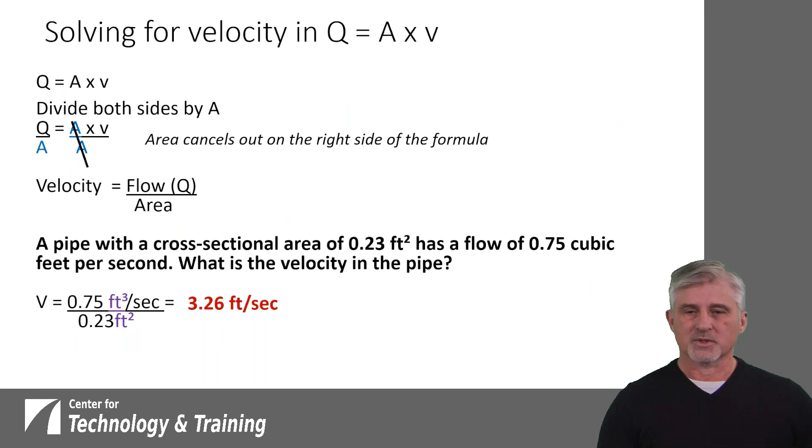All right, we're on to our poll number 8. What flow in gallons per minute is needed to flush a 500-foot section of 6-inch water main at a velocity of 5 feet per second?

All right, Daryl, that poll is launched. Looks like we have just over 50% of people that have put in their answers, so I'm going to give everyone some more time. All right. Majority of people have now voted, and I'm going to be closing the poll in just a couple of seconds, so make sure you get your answers in. All right, closing the poll now.

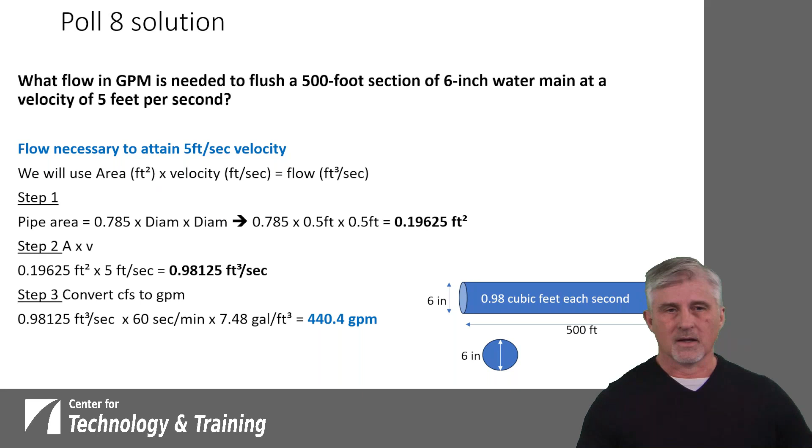And intermediately, we would have cubic feet per minute. And then we're going to multiply by the number of gallons in a cubic foot. That's 7.48 gallons per cubic foot. That cancels out our cubic feet and gives us a resulting answer in gallons per minute. And that is 440.4 gallons per minute.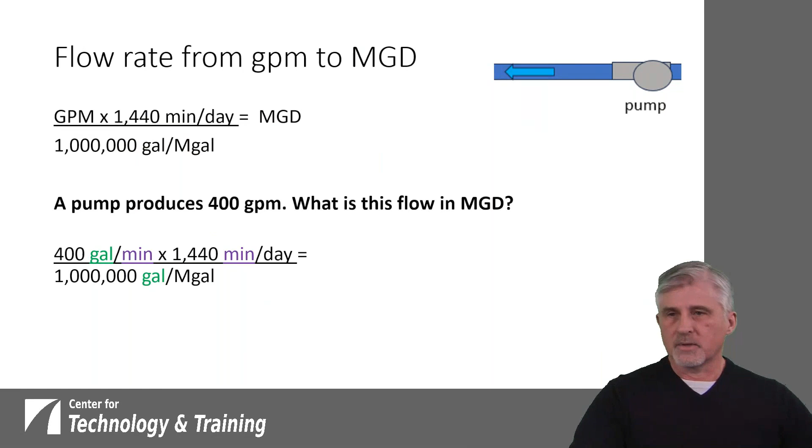So a pump produces 400 gallons per minute. What is its flow in MGD? So if we take our 400 gallons a minute, we multiply that by the number of minutes in a day, 1440, and we divide that by 1 million gallons per M gallon, which is essentially dividing it by 1. So we do that, we'll end up with 0.576 MGD.

So our gallons cancel out, our minutes cancel out, and the M gallon in the denominator of the denominator ends up on the top, and then it's per day because that denominator still stays. So we end up with 0.576 MGD.

So we can do flow rate conversions between CFS and GPM, and from GPM to CFS. What we're going to utilize to go from CFS to GPM is we're going to take the cubic feet per second, whatever we're given, multiply by 60 seconds per minute, and then by 7.48 gallons per cubic foot to give us gallons per minute. So the seconds will cancel, the cubic feet will cancel, and we'll end up with something in gallons per minute.

Now, if we want to go in the other direction from gallons per minute to cubic feet per second, we're going to take what we're given in gallons per minute, multiply by 1 minute per 60 seconds, and then multiply by 1 cubic foot per 7.48 gallons. And so our gallons will cancel, our minutes will cancel, and we'll be left with something in cubic feet per second.

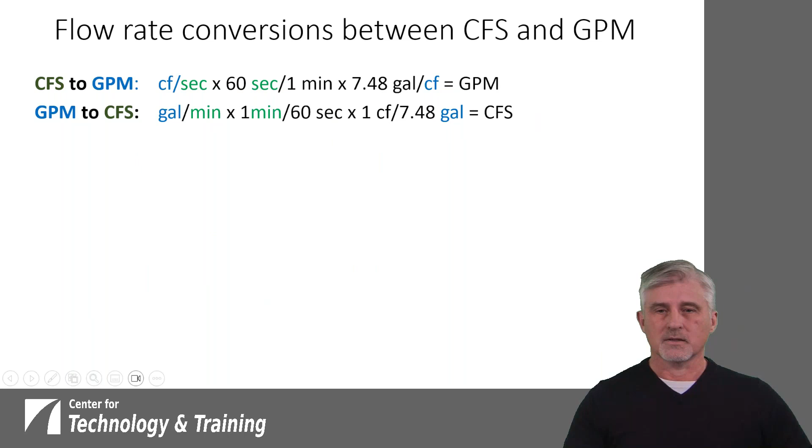So we've got an example of a pipe that has a flow of 0.5 cubic feet per second. What is this flow in gallons per minute? So we take our 0.5 cubic feet per second, we multiply it by the 60 seconds in a minute and 7.48 gallons per cubic foot, which is this top formula, and we end up with 224.4 gallons per minute.

So now we're going to look at going in the other direction. If we've got a pipe that has a flow of 500 gallons per minute, what is that flow in cubic feet per second? So we have our 500 gallons per minute times 1 minute per 60 seconds times 1 cubic foot per 7.48 gallons. Gallons and minutes cancel out, and we end up with 1.11 cubic feet per second.

So now let's look at a situation where we have flow velocity and we're going to do a conversion. So we've got a pipe with a diameter of 18 inches and a flow of 800 gallons per minute. What is the velocity of flow in the pipe? First step, we want to get everything into feet. So we need to take that 18 inches and convert it into feet. We simply divide 18 by 12, and that tells us that the 18-inch pipe is 1.5 feet.

Next, we're going to calculate our area. So we take 0.785, we multiply by 1.5 and by 1.5. Remember, you could also do pi r squared. Either one works, and that answer is 1.766 square feet.

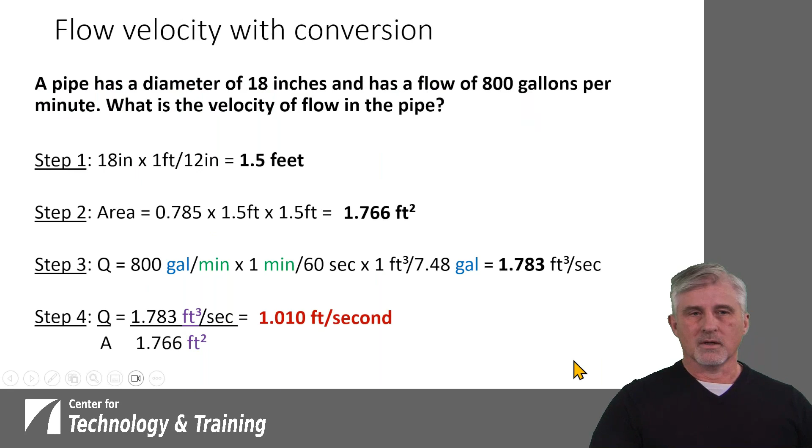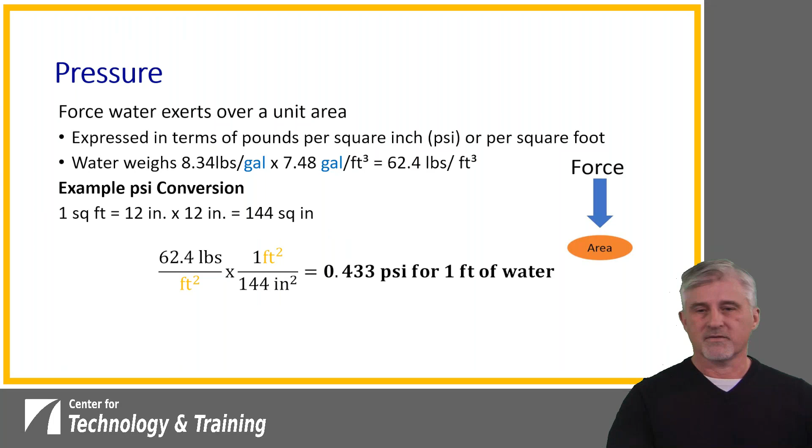Now, if a foot of water is 0.433 psi, we can divide a foot by 0.433, and that'll tell us that there's 2.31 feet for every psi. So 2.31 feet per psi is another important thing to remember.

So pressure example. In this example, we've got a 10-foot wide by 20-foot long by 6-foot deep tank. We've already calculated that it holds 8,967 gallons of water when it's full. The water weight: if we take that 8,976 gallons and multiply by 8.34 pounds per gallon, we know that water weighs 74,850 pounds. And all of that acts on the 10 by 20 foot bottom of the tank. So what is the pressure in PSI on the bottom of the tank?

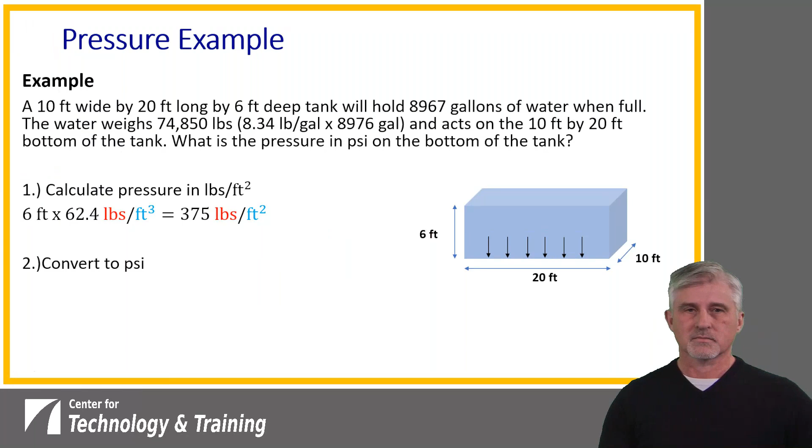The first thing we want to do is calculate the pressure in pounds per square foot. We've got 6 foot of water, and we know that it weighs 62.4 pounds per cubic foot. So that means we have 375 pounds per square foot. Now, if we want to convert that to PSI, we know that a square foot is equal to 12 inches by 12 inches, or 144 square inches.

Pressure in PSI is going to be that 375 pounds per square foot multiplied by 1 square foot per 144 square inches, or 2.6 pounds per square inch, 2.6 PSI. So that's our pressure in PSI. Note that the pounds stay, the square feet cancel, and the square inches stay.

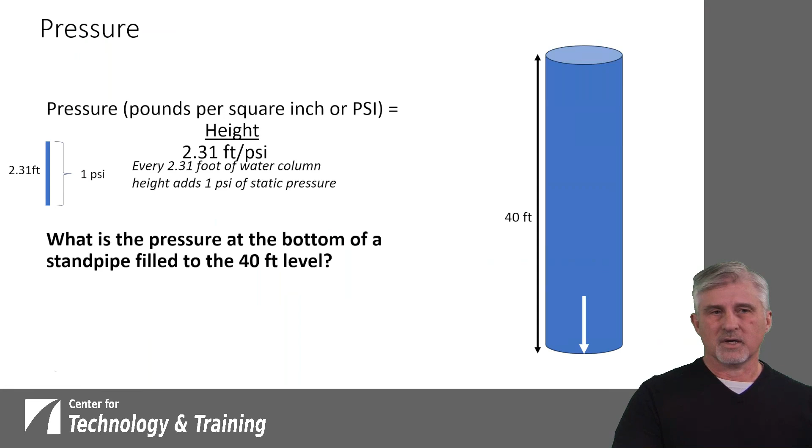So pressure can also be looked at a little differently. Pressure is pounds per square inch, or PSI. We said that 2.31 feet is equal to 1 PSI, so every 2.31 feet of water column adds 1 PSI of static pressure. So what is the pressure at the bottom of a standpipe filled to the 40-foot level? We've got the standpipe, and we want to know what the pressure is here at the bottom.

So we're going to take that 40 foot of height and multiply it by 1 PSI per 2.31 feet. Those are equal, so we can multiply them. Note that the feet cancel, and that gives us an answer in PSI. So a 40-foot high water column is going to have 17.3 PSI.

So our next poll: we have a standpipe with a 25-foot diameter. It's filled to a level producing 11 PSI at the tank bottom. How many gallons are in the standpipe? All right, Daryl, that poll is launched.

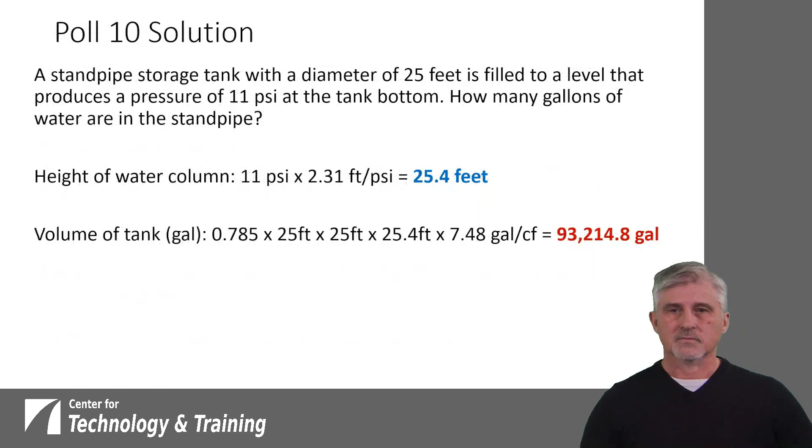We've got a tank with a diameter of 25 feet and 25.4 feet of water in it. We multiply 0.785 times 25 times 25 times the 25.4 height, and then convert from cubic feet to gallons by multiplying by 7.48 gallons per cubic foot. That gives us 93,214.8 gallons. Whoops. So that's how we came up with that answer.

Fortunately, there's only one more math poll question. Now we're going to look at concentration, just the concept, the different ways that we can look at concentration. We can look at parts per million. Parts per million is simply the number of parts of something over a million parts.

And when we look at milligrams per liter, it's pretty much the same thing, because there's a million milligrams in a liter. So what we're doing is we're comparing the number of milligrams to a liter, but it's really the number of milligrams per million milligrams. So parts per million and milligrams per liter are the same thing. I'll use them interchangeably, and it's important to understand that they're the same. I think that causes a lot of confusion.

We also look at concentration in percentages. We are all accustomed to what a percent is. 1 out of 100 is expressed as 1%. Well, if we're looking at milligrams per liter, 10,000 milligrams per liter is equivalent to 1%. And then, doing the conversion, 1 divided by 100 is equal to the fraction, or to 0.01 as a decimal.

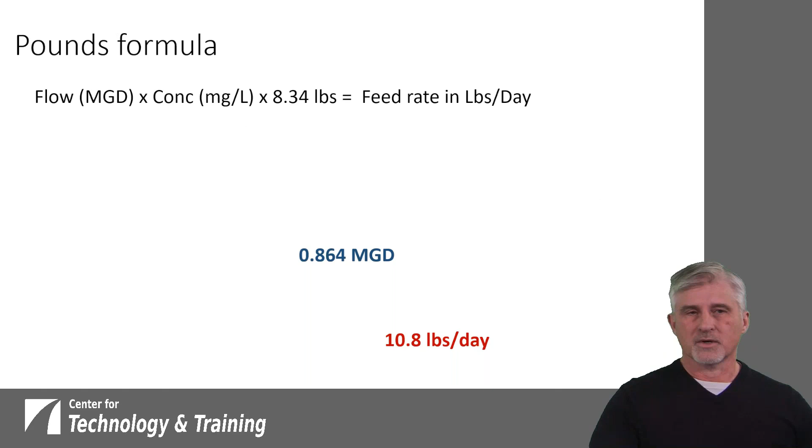So we have a well that produces a flow of 600 gallons per minute. We already know we need it in million gallons a day, so we're going to have to change that. And then the chlorine dose is 1.5 parts per million. What is the feed rate of gas chlorine in pounds per day? So gas chlorine is 100% available.

So we will first convert our flow to million gallons a day from gallons per minute. To do that, we take our 600 gallons per minute, we multiply by the number of minutes in a day, and then we divide by 1 million gallons per MG. So that's going to tell us that we have 0.864 MGD. That's our flow when we convert it.

So now we're going to use our pounds formula. This formula up here, we're going to take our flow in MGD. We're going to multiply that by the concentration in milligrams per liter or parts per million, and then we'll multiply by 8.34 pounds per gallon. And we get an end result of 10.8 pounds per day.

So we can look at another example to help understand this. A water well flows at 1.2 MGD and has gas chlorine dosed at 2 parts per million. What is the feed rate in pounds per day? We take our 1.2 MGD, our flow, we multiply that by the parts per million, 2 milligrams per liter, and then we multiply by the weight of a gallon of water, 8.34 pounds per gallon, and that gives us 20 pounds per day.

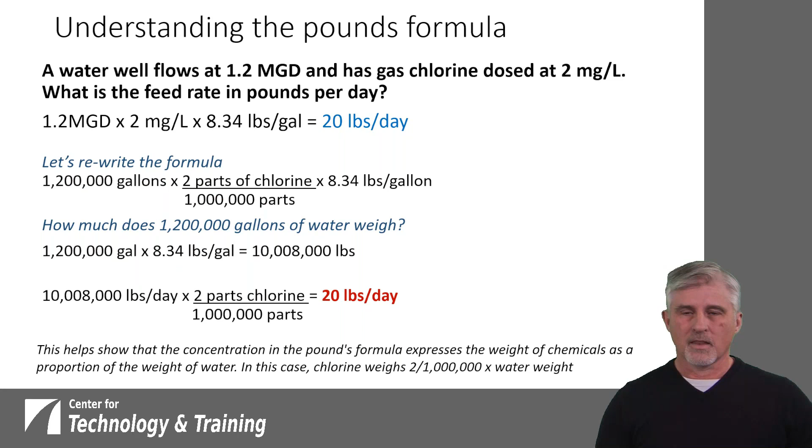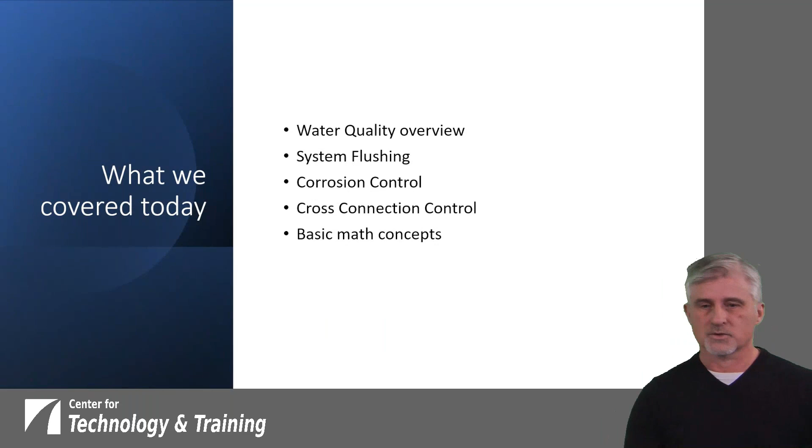So what did we cover today? We did a water quality overview. We talked about system flushing, some corrosion control, cross-connection control, and then I talked about some basic distribution system math ideas. So main takeaways, typically people can only focus on a few things, and what do we want you to know?

Flushing, water age management is most effective at a velocity of 5 feet per second for 3 pipe volumes and is part of water main repair procedures. Water age control and biofilm management to improve water quality. Corrosion control involves knowledge of water quality factors and can require adjustment of pH and alkalinity or orthophosphate treatment. Cross-connection control involves protecting public health by ensuring adequate separation or isolation between contaminants and drinking water.